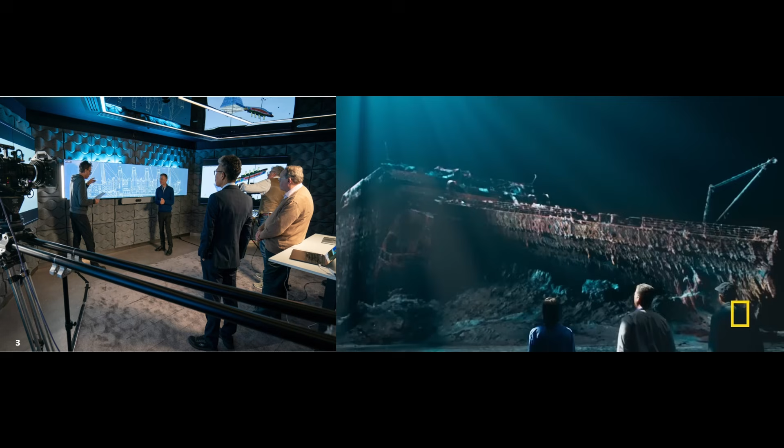To address these questions, the UCL research team carried out the most comprehensive physics-based digital reconstruction of the Titanic's final hours to date. This project was led by me and commissioned by Atlantic Productions in 2025. The work was undertaken together with my team members, Hyung-Jin Kim, a PhD student at UCL, and Mr. Brian Thomas from Thomas Naval Architecture in New York.

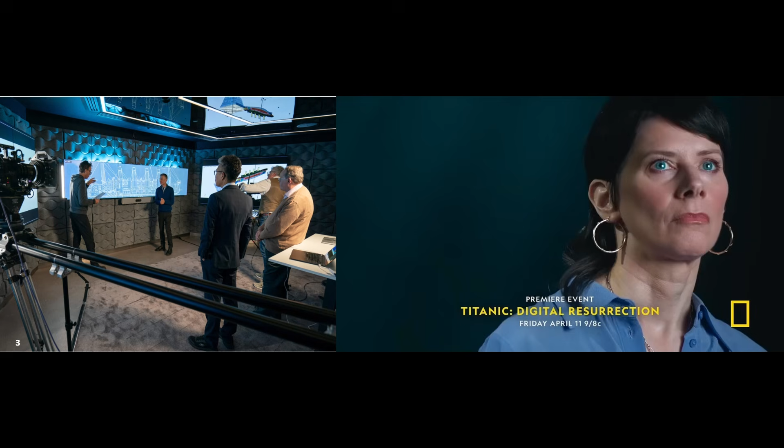The results of this project were featured in the documentary Titanic: Digital Resurrection, first broadcast by the BBC and National Geographic in 2025 to mark the 113th anniversary of the disaster. As the principal investigator, I participated in the filming together with Dr. Simon Benson and Dr. Stephen Payne, under the direction of Atlantic Productions in London. The full scientific outcomes of this work have been published as an open access paper in the journal Ships and Offshore Structures.

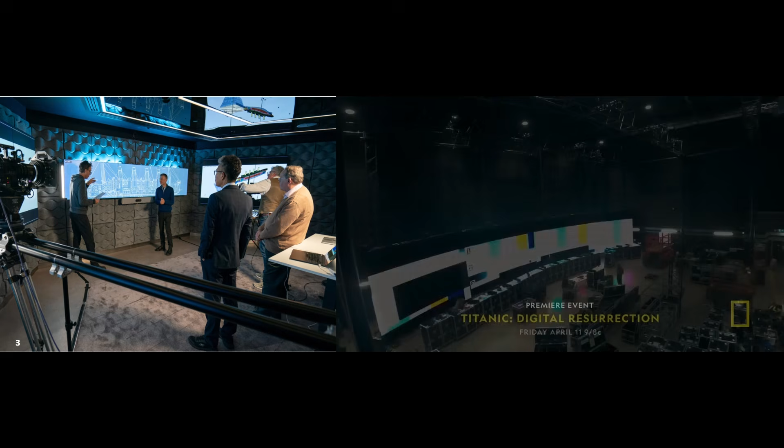To digitally reconstruct the sinking of the Titanic, we first needed to build accurate three-dimensional computational models suitable for structural and flooding simulations. This required extensive manual digitization. The original ship drawings were available only as early 20th century blueprints, not modern CAD files. Our team carefully traced and reconstructed the ship's geometry by hand, followed by rigorous verification to ensure geometric accuracy and realistic material properties. This pre-processing stage was essential. Without accurate geometry and material modeling, reliable numerical simulations would not have been possible.

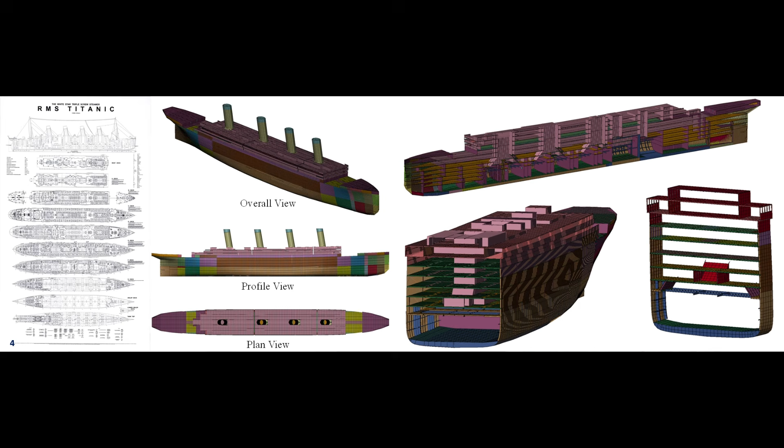Equally important was defining realistic collision scenarios between the Titanic and the iceberg. The speed, angle, and location of impact strongly influence hull damage and the subsequent sinking process. To establish scientifically credible input conditions, we reviewed extensive historical evidence. This included eyewitness testimonies from the US Senate hearings and the British Board of Trade inquiry, as well as modern forensic and engineering studies.

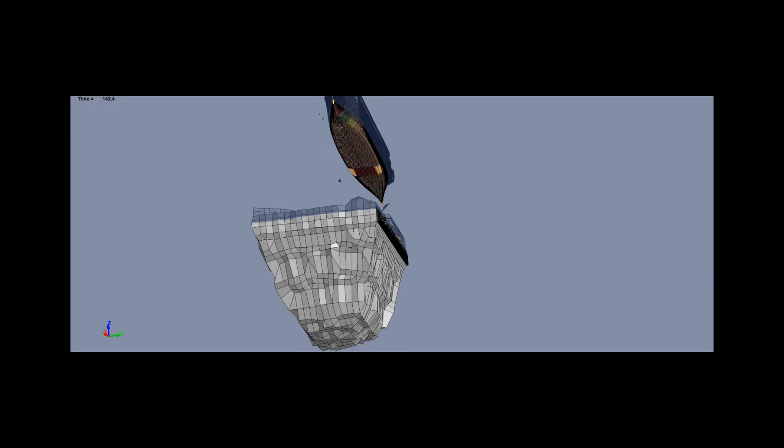At departure from Southampton, the Titanic's draft was recorded as 10.26 meters forward and 10.46 meters aft, indicating a near fully loaded condition. By the time of collision, some coal, fresh water, and provisions had been consumed. We therefore assumed a reduced draft of 9.37 meters forward and 10.29 meters aft, corresponding to an estimated displacement of 48,300 long tons. At the time of impact, the ship was traveling at approximately 22 knots.

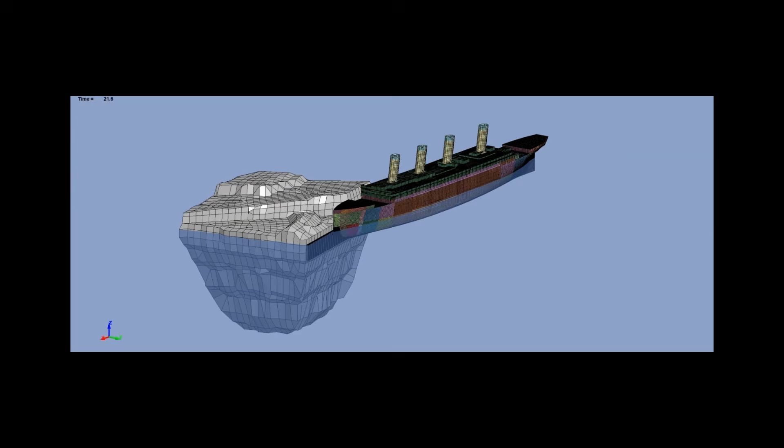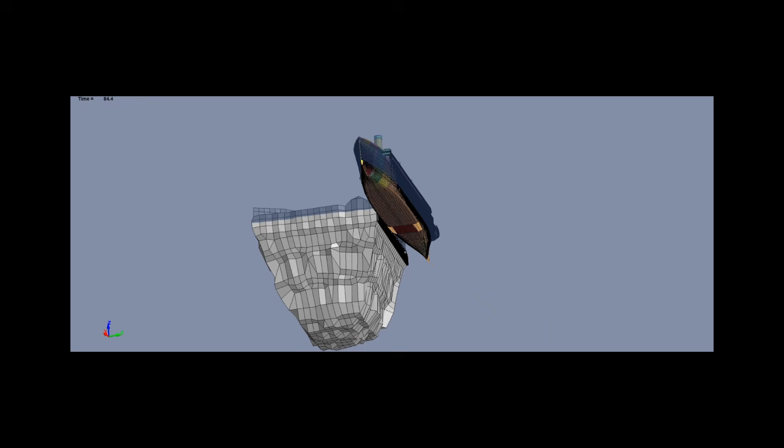The iceberg was sighted by lookout Frederick Fleet, who rang the warning bell and reported "iceberg right ahead." First Officer Murdoch ordered evasive maneuvers, including hard starboard, followed by engine commands. The estimated collision angle between the ship's longitudinal axis and the iceberg face was approximately 15 degrees with initial contact near the forepeak tank.

Eyewitness testimony from Frederick Barrett, the leading fireman on duty in Boiler Room 6, reported that a hole appeared approximately 2 feet above the stokehole plates. This observation was used to define the vertical location of the hull damage in our simulations.

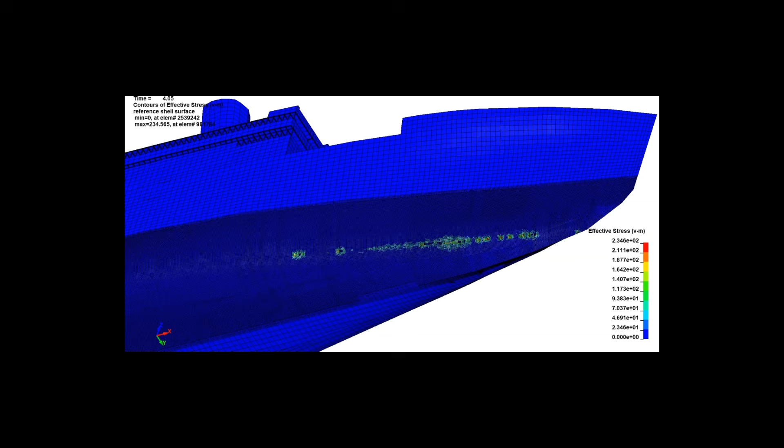The total contact duration between the hull and the iceberg was calculated as approximately 6.26 seconds in the simulations, which agrees well with eyewitness estimates of 6 to 7 seconds. The resulting hull breaches were concentrated within a narrow longitudinal strip on the starboard side, extending across 6 watertight compartments, from the forepeak tank to the aft bulkhead of Boiler Room 5.

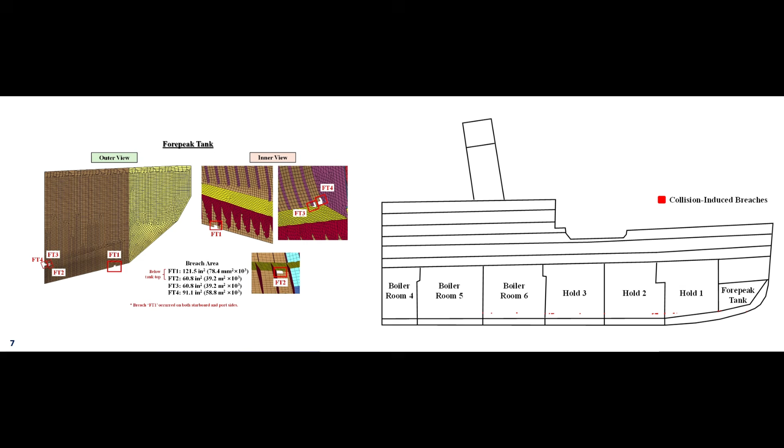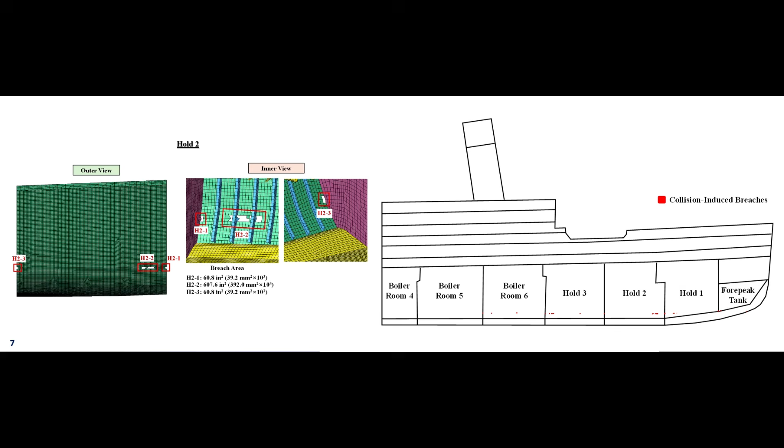Most individual breaches were relatively small. Many were smaller than the size of an A4 sheet of paper. The total simulated breach area was approximately 1.7 square meters, about 1.5 times larger than the estimate previously made by Edward Wilding, a senior naval architect at Harland and Wolff.

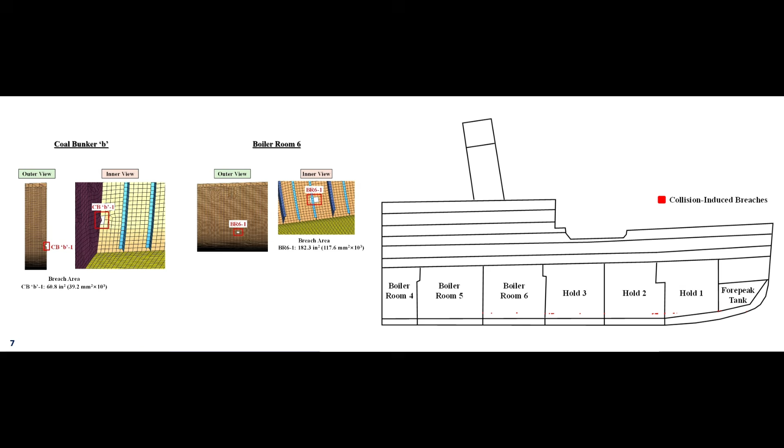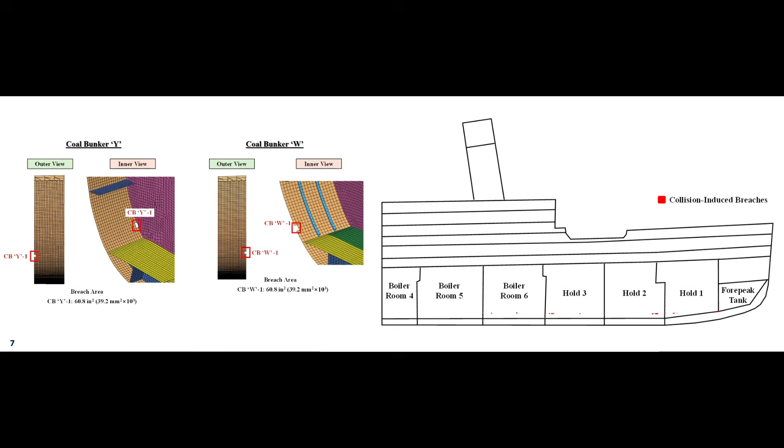Although the breaches were small in size, their distribution across 6 watertight compartments made progressive flooding unavoidable. This longitudinal spread, rather than the size of individual holes, was the key factor leading to the loss of the ship. Flooding began immediately after the collision.

The Titanic was equipped with 5 ballast pumps and 3 bilge pumps, providing a theoretical maximum pumping capacity of about 11.4 tons per minute. In reality, pump performance was severely limited by falling steam pressure and by discharge outlets becoming submerged. By comparison, our simulations show that the average flooding rate during the first hour was approximately 243 tons per minute, more than 20 times the maximum pumping capacity.

By 113 minutes after the collision, 6 forward compartments were fully flooded. At this stage, the bow trim had reached about 4.5 degrees. After this point, the trim increased rapidly, leading to a catastrophic loss of buoyancy.

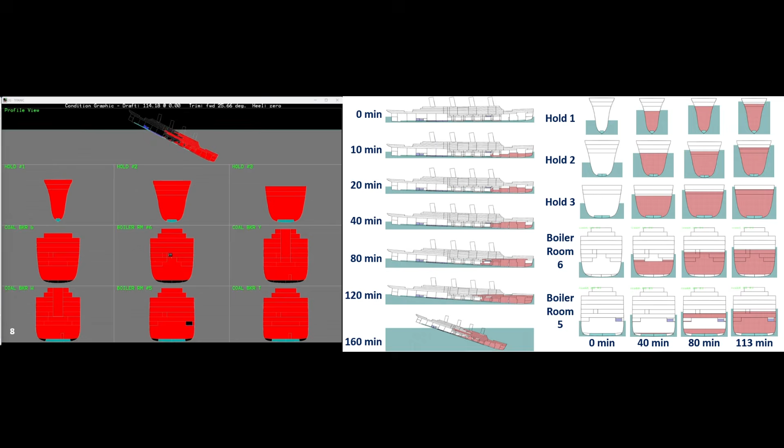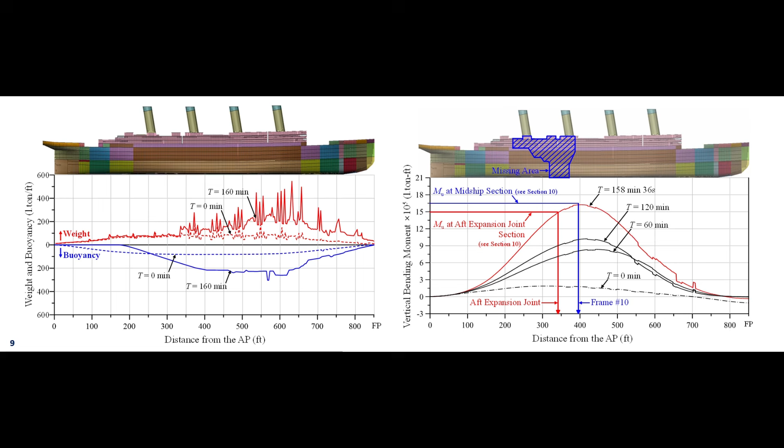As flooding progressed, the weight distribution along the ship changed significantly. Floodwater added weight to the forward part of the vessel, while buoyancy was progressively lost at the bow. This imbalance generated rapidly increasing hogging bending moments along the hull girder. At 158 minutes and 36 seconds after the collision, the trim angle reached approximately 14.35 degrees. At this moment, the maximum hogging moment occurred near the aft expansion joint, initiating the first global hull girder collapse.

Before global collapse, local structural failures developed under increasing hull girder loads. The bottom structure experienced high compressive stresses, leading to buckling, while the deck structure was subjected to tensile stresses, causing yielding and tearing. These local failures reduced the effective stiffness of the hull girder and accelerated the global collapse process.

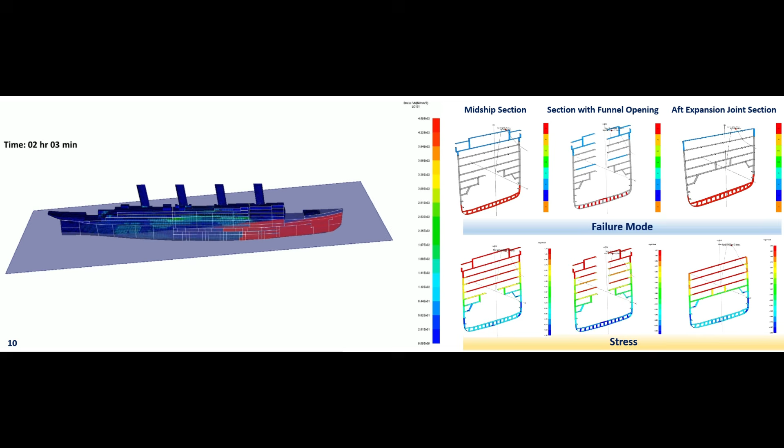The hull girder collapse at the aft expansion joint occurred at a trim angle of 14.35 degrees. Once the critical hogging moment was reached, structural failure progressed rapidly. First of all, deck structures fractured in tension, producing visible tearing of the superstructure, and then bottom and inner bottom structures buckled and crushed under compression. Finally, the failure propagated both vertically and longitudinally, leading to a clean breakup of the hull.

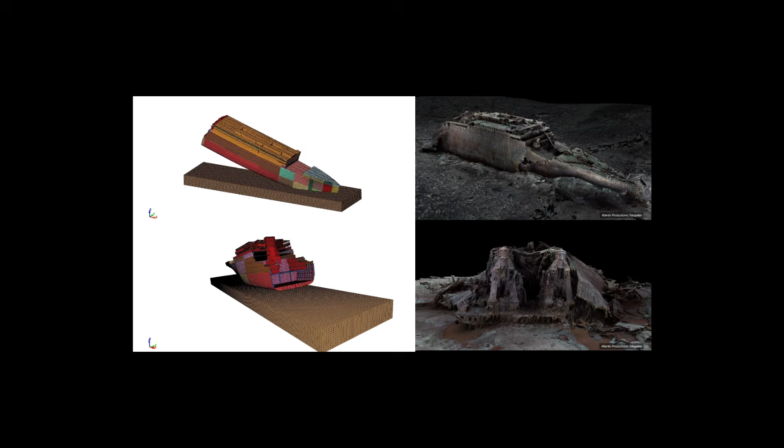These simulated events are consistent with eyewitness accounts, including reports of funnel collapse and the observed breakup location near the aft expansion joint. The Titanic sank following a glancing side collision with the iceberg. Although the ship narrowly missed the iceberg, the resulting side damage extended across 6 compartments, making the vessel unsalvageable. This raises an important engineering question. What would have happened if the Titanic had struck the iceberg head-on, possibly at a reduced speed?

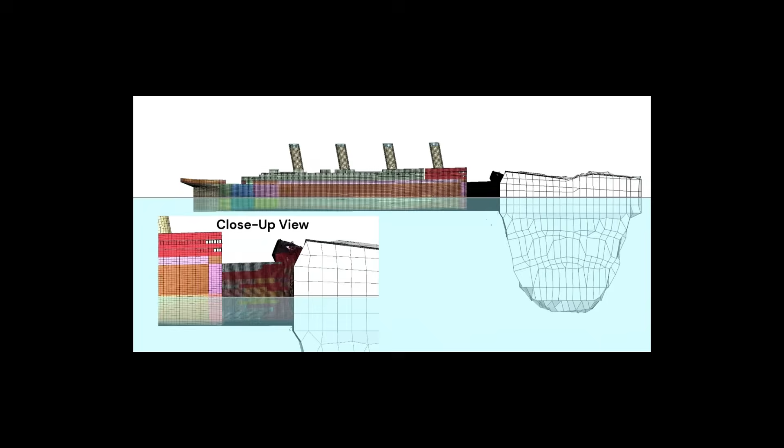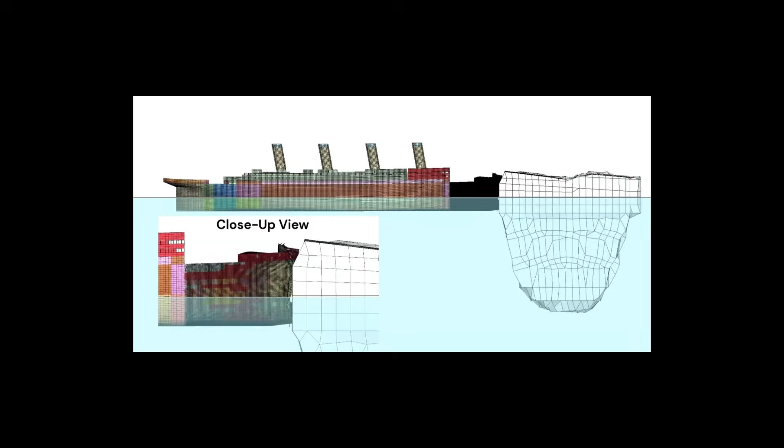In maritime engineering, side collisions typically produce longitudinal damage along the hull, while head-on collisions concentrate damage at the bow. Our simulations indicate that even at full speed, a head-on collision would likely have confined damage to the forepeak tank and holds 1 to 3. In that case, the watertight bulkheads would probably have prevented progressive flooding, and the ship could have survived. At lower collision speeds, the damage would be even more limited, further increasing the likelihood of survivability.